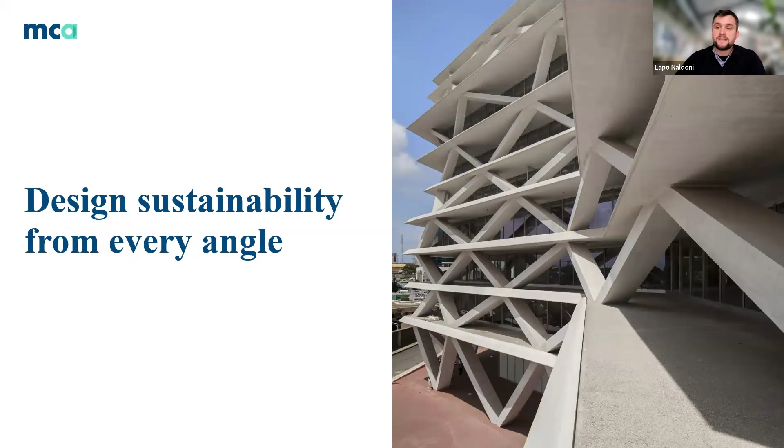In that case, now we have this building that we designed in Africa. What is nice to see is that the shape of the building is designed in order to help the people that will build it, in order to have a very simple system in terms of climatic control, and of course in the buildability of the building, because the building itself is made of just two materials: concrete, reinforced concrete, and glass. Nothing more, so no shading system, because the structure itself is the shading system of the building.

So what we think is that we can redefine the beauty of our time by putting together sustainability—all the systems that we need in order to have a sustainable building—and the systems that we use for our buildings. All of this is inside the sustainability development goals. So we have very strong requirements from our nations, and the goals are really complicated to be reached. We know that we have very strong challenges, and we try to do our best in order to reach as much as possible in all the angles, all those targets.

And what is relevant for us as engineers and architects is that we are responsible for a large amount of the use of energy, and of course for the production of CO2 related to the production of materials and the use of the buildings.

Usually inside the R&D department, when we start to discuss a building, we know that when we decide the strategy to build and to design our building, usually we focus our attention on the operational phase. But what is crucial is to know that we are just speaking about 50% of the total amount of energy, so of CO2 emissions that we are considering.

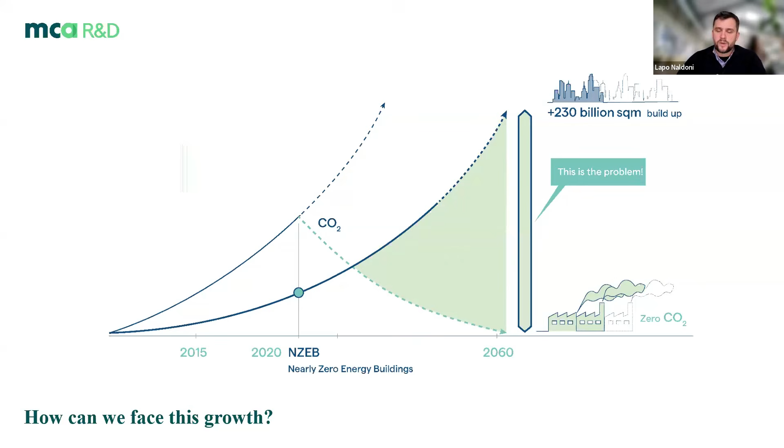For this reason, since the beginning, inside the office, inside Mario Cucinella Architects, we have a department of research and development where I am. So the focus of the team is to support the architects and the engineers inside the office in order to find the best strategy to create a strong concept in the architecture from the beginning.

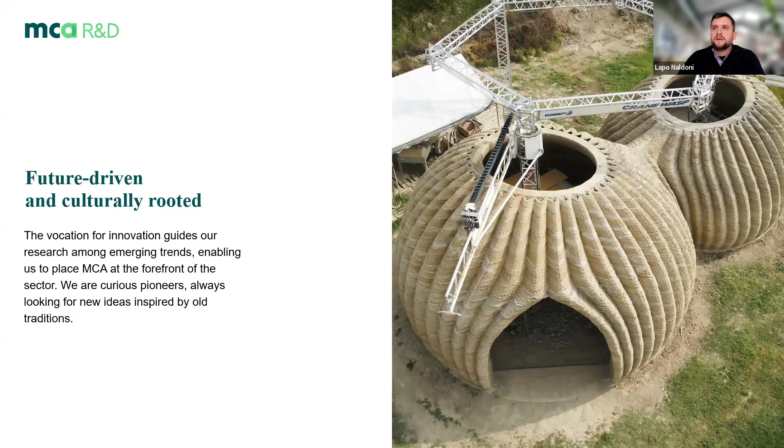Of course, everything is done with really culturally rooted ideas. So as the architect usually says, the future is a journey in the past. And I mean, every time we try to take the best from the past in order to have a good idea for the future. Of course, we have not just this mission.

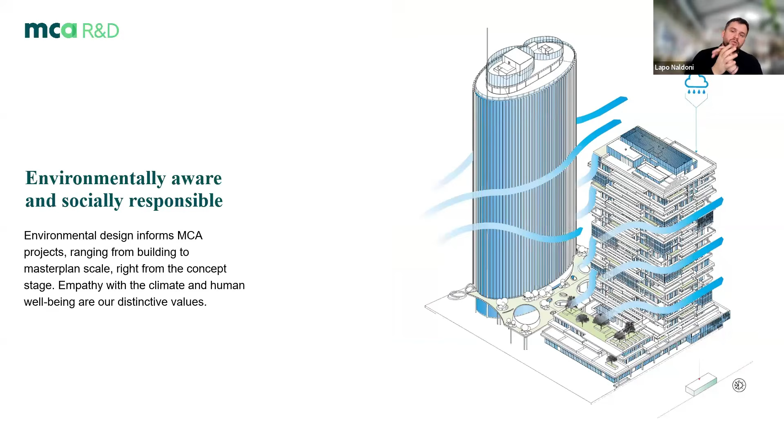We work a lot in terms of environmental studies, so we help the teams to find the best strategies to control the environment that we have around our buildings. So in that sense, in our office, we can say that research informs projects. With the research, we inform our colleagues about new technologies, a new approach, and the projects inspire us to develop new research for the next steps.

Let me start now with some projects that we developed on the 3D printing side. A technology that in the last 10 years has really been under the lens of attention around the world. So the office started at the end of 2019 to discuss with 3D Wasp, an Italian company that develops 3D printers.

We started to discuss the possibility of putting the effort of 3D Wasp and MCA together in order to develop a project that can show the limit, so the upper target of 3D printing at the time. So for this reason, we started by taking into consideration all the ideas that at the time were related to the use of 3D printing.

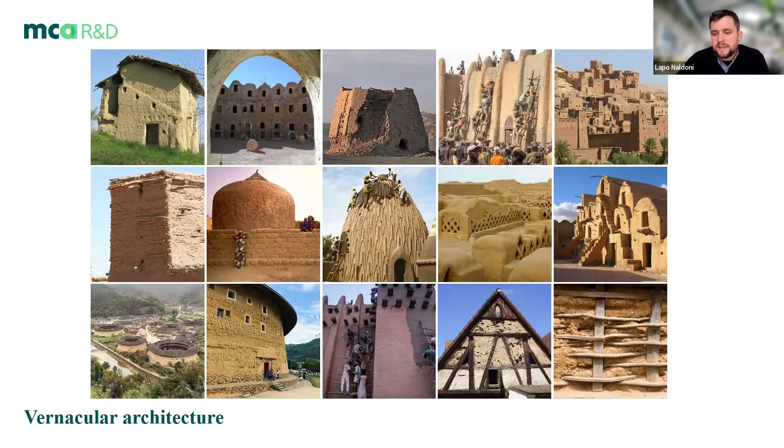And from this inspiration, we decided to start imagining how the use of 3D printing could be with natural material like soil. So together with the students of the Master of Sustainability of the office, SOS, we started imagining this kind of diagram in order to understand and to design a diagrammatic architecture that can be adapted in different locations. So we started from who will be the user of the building, the needs, the number of people that will use the building, where. So by taking into consideration the location, we take into consideration the climate, the materials, the resources that we can find. And with these, we develop the strategies together with the students.

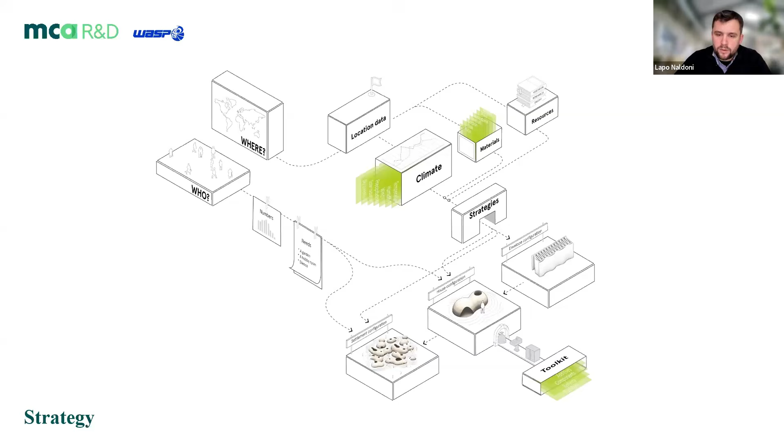And in that case, every time we try to push the students to develop a bottom-up system. So we don't want to start from the master plan and arrive at the technological side of the building, but we start from the walls that we can produce with the local resources. And with this kind of wall, we design the final shape of the building. And with the shape of the building that we have, we design the master plan. No? So it's not top down, but bottom up, from the wall to the master plan.

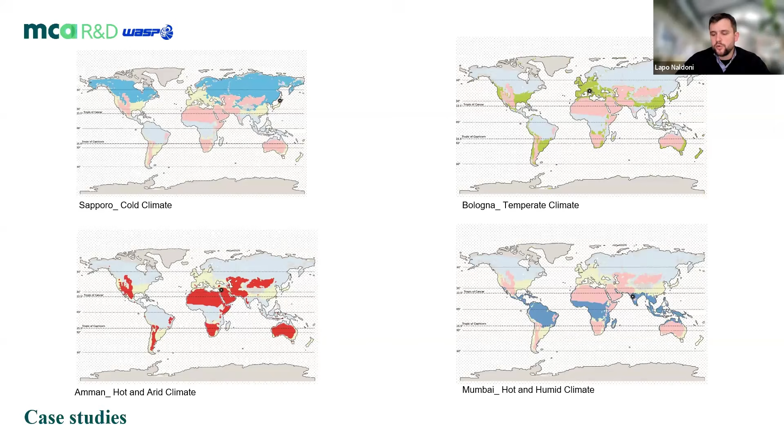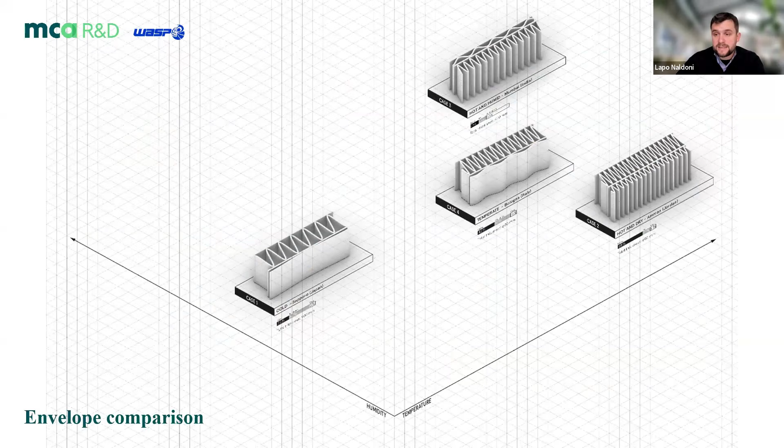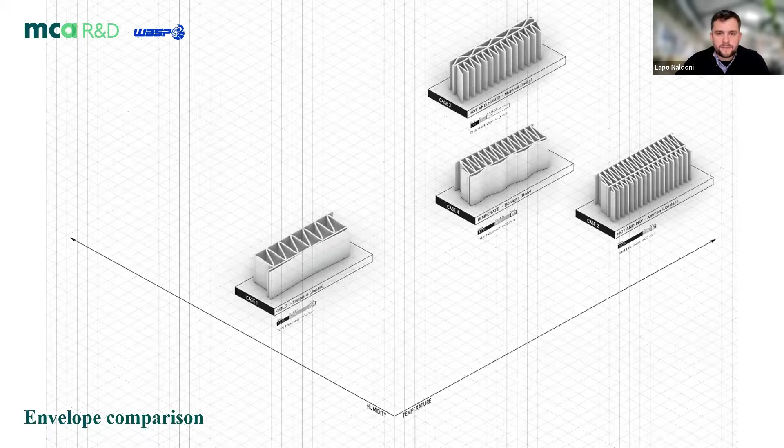And here you can see the different walls that a printer can produce with the same material, because starting from the exact same printable paste, you can decide the amount of ventilation spaces, the amount of insulation spaces, the amount of structural spaces. So in that sense, you can change the shape in order to solve different kinds of issues that you can find in your location. And in the case of Bologna, we started with the primitive surface that the office designed together with the engineering studio.

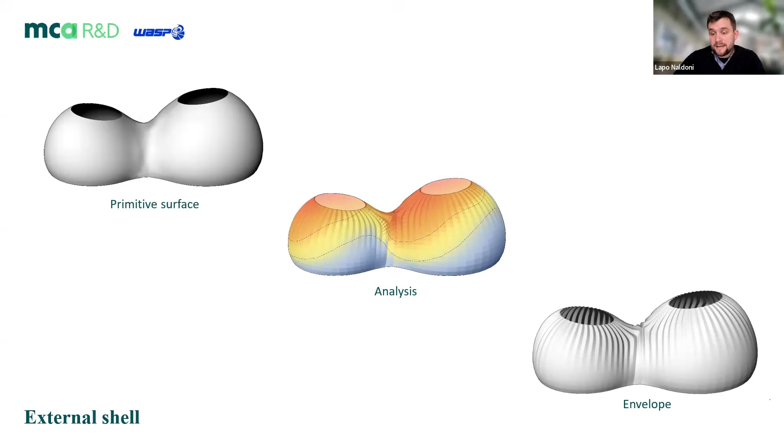And with this shape, we started to analyze the shape and decided to adopt this kind of corrugation that we use for 2 reasons: increase the natural ventilation along the wall, and reduce the heating effect on the surfaces, because this kind of corrugation helps in a sort of self-shading, like in the succulent plant, in order to reduce the effect of the sun on the surfaces. So here you can see a recap of all the different technologies embedded in the skin of TECLA.

It's nice to speak about the skin because it's really similar to what happens in a biological skin, because everything is interconnected. So we use the wall not only as a wall, but as a system to protect the people inside the wall. Here you can see one of the first renders designed by the students. And here we focus our attention on all the parts that are not printed. As I mentioned, we tried to print as much as possible.

This is the reason why Tecla has no roof, but Tecla is a dome. But for practical reasons, you can understand that producing tables, chairs, and all the furniture for the inside is more effective if it is done with wood. Same for windows and roof that are made of wood and glass. So everything was designed in order to be collected and shipped inside a 20-foot container.

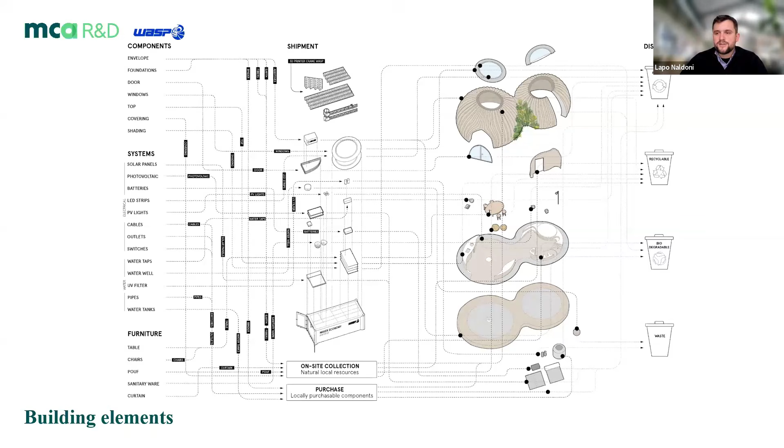And you can imagine that in the future, when you want to dismantle the building, you can just remove all these technological parts, and the building itself remains a sort of hill of soil. And as a matter of fact, you can see this image where we try to explain what happens if you remove the technological part from the building.

In this slide, you can see the work that we have done together with Mapei, our partner for the materials, in order to arrive at a printable paste. At the beginning, we started together with WASP in order to reduce the amount of water inside the paste, in order to reduce the shrinkage of the material. But we understood quite fast that this material had a lot of problems in terms of adhesion, one layer with the other, and pumpability inside the machinery.

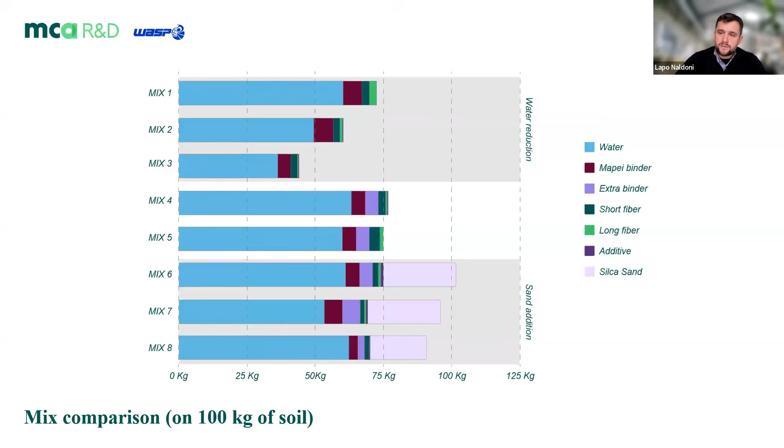So the pumpability was not perfect, so a lot of corrosion inside the pump due to the stiffness of the material. So we decided to change the mix and started adding silica sand in order to reduce the shrinkage but have a more fluid paste during the printing.

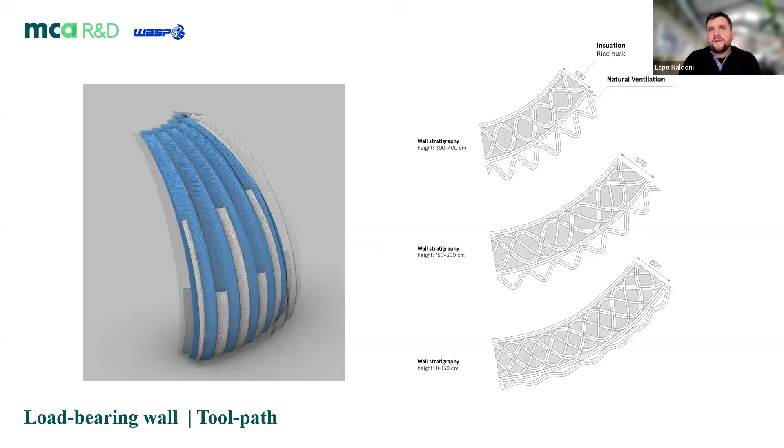So with this printable paste, we started working with Milan Engineering, our consultant for the engineering part. And we decided to use a structural part, only the blue part, and the white part that you can see on the left is just for the insulation and the ventilation of the wall. On the right, you can see how we changed from the bottom to the top the amount of material inside the wall in order to reduce the weight of the wall. I mean, the material was earth, so we needed to find strategies in order to reduce the stress on the material.

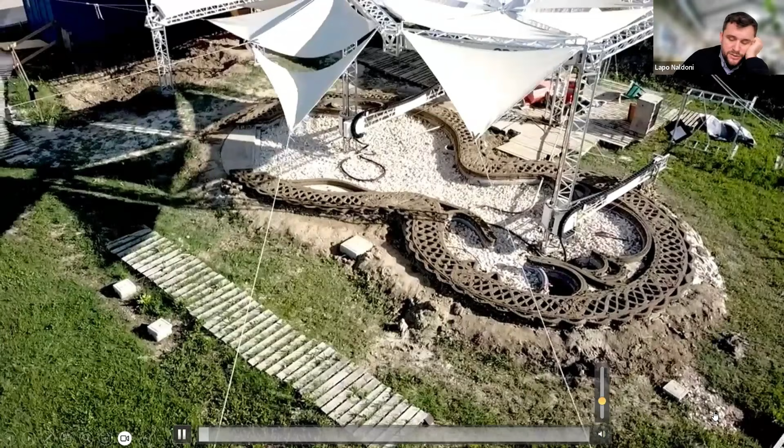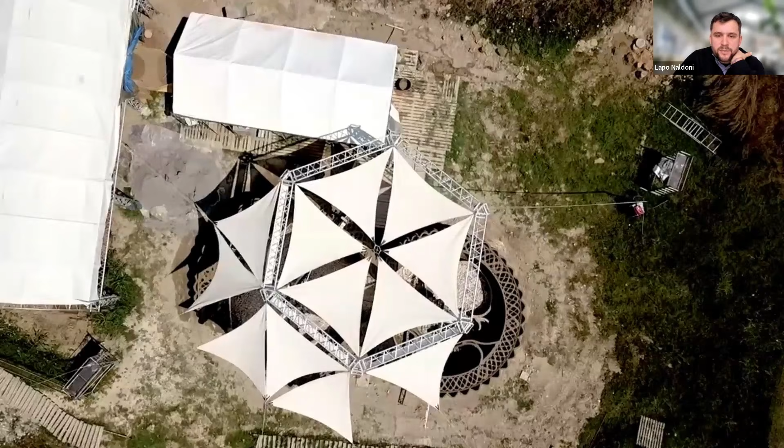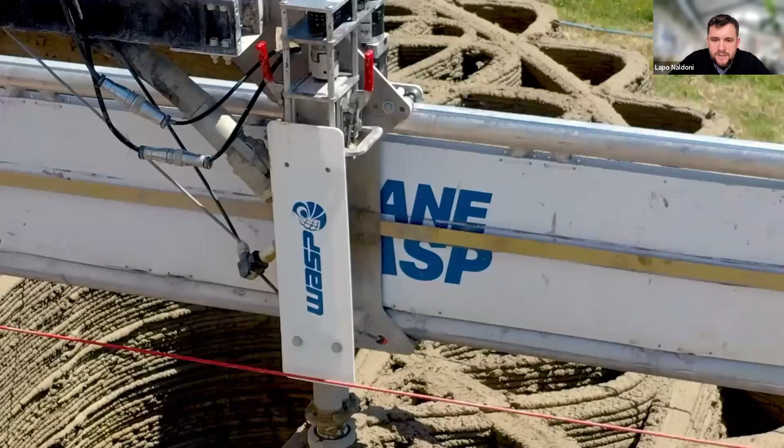Here we have a video of the construction phase of Tecla. As you can see, to build Tecla, WASP decided to use two printers. So the system that printed Tecla was composed of two printers that work together in order to avoid collision and reduce the printing time. So not one nozzle, but multiple nozzles in order to reduce the amount of time. We are speaking about something like 250 hours of building site, of course split across different weeks, because it was a prototype, and the machinery was a prototype, so everything was tested for the first time in this project.

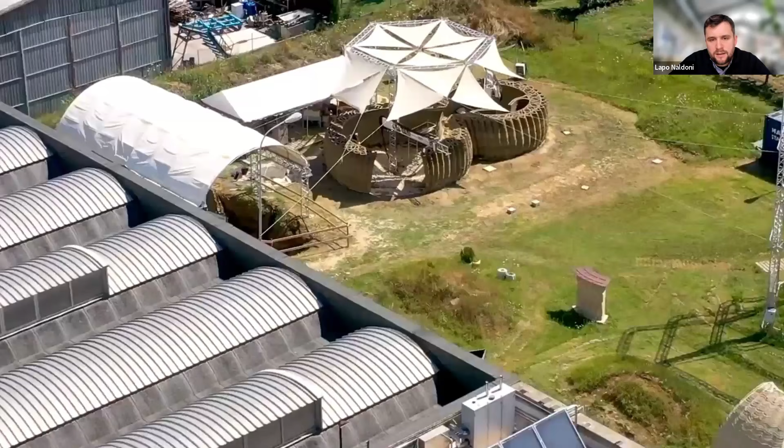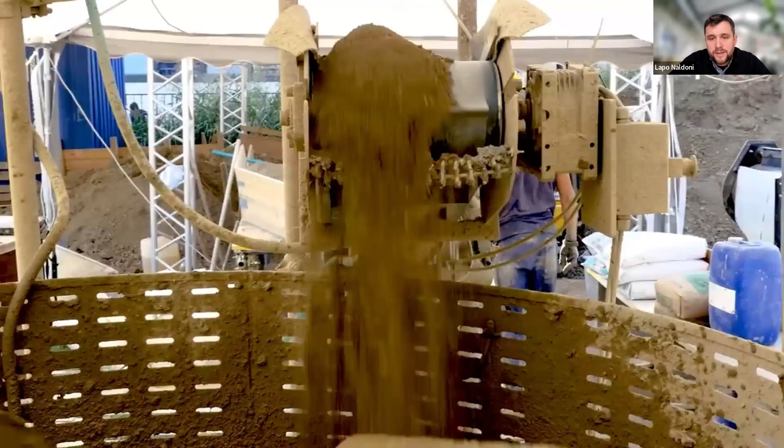As you can see here, you can see the ventilation part on the outside and the infill part for the insulation in the inner part of the wall. And in this time lapse, you can see that everything was printed and realized across August and September 2020. So it was during COVID, not the best or simplest time to have a research project, but we tried to do our best in order to arrive at this 3D printed construction.

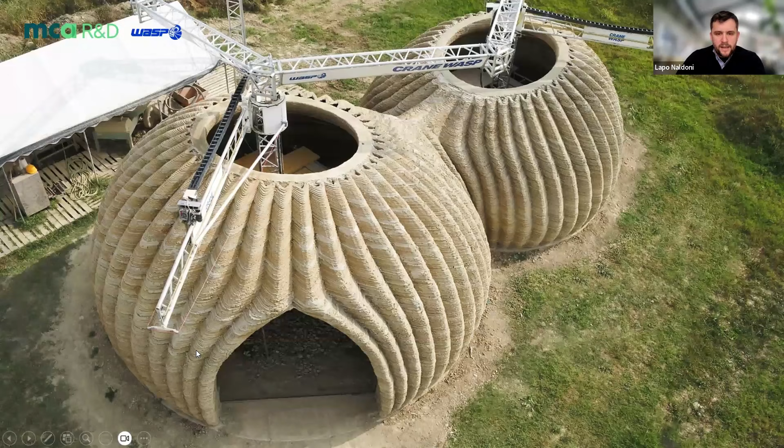But this is not the only project designed from the office for 3D printing. As I mentioned, TECLA was the first stage, but we understood quite fast that it was not so easy to have every time a building site that we can use with on-site machinery.

Those are some data, as a sort of recap of what I mentioned: 2 Crane WASP machines, 200 hours of printing, a lot of G-codes, kilometers of extrusion, 60 cubic meters of material, a lot of energy to use the machinery in the building site.

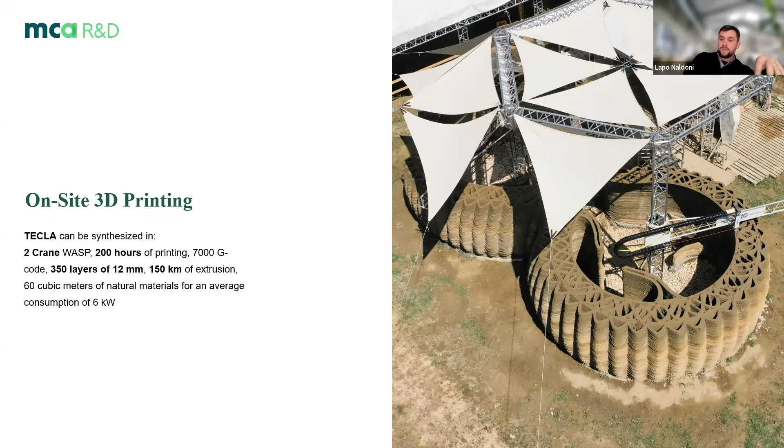Moreover, not every time is it possible to set up machinery in the building site. Sometimes you have building sites where it's not possible to transport the machine inside, or you have no space for the machine. Or in other cases, you haven't a lot of time in the building site for the machine. So sometimes it's better to have the option to use the same technology for speed, for costs, for injuries—so use the same technology, 3D printing, but not on site.

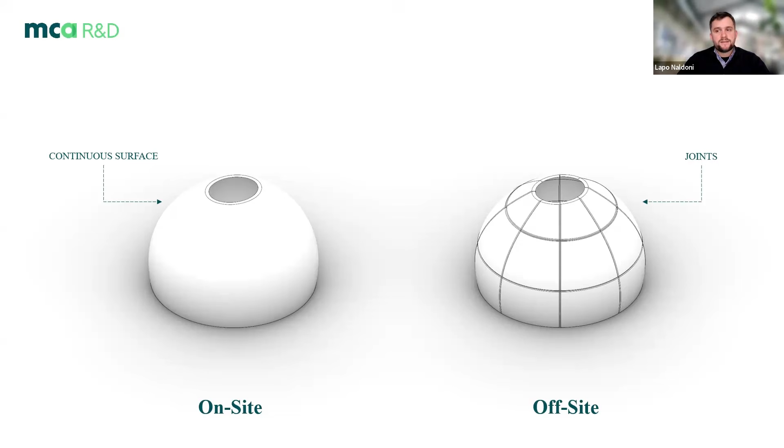So inside the office, we said, okay, we are architects—what is the strategy in order to use 3D printing to do something like TECLA, to do an architecture in this time. Of course, the first idea was to say, okay, we can split the dome and assemble the parts of the domes. But as you can see in this slide, the joint design becomes the most visible part of our building, so it drastically changed the aesthetical approach of our building.

So we started to try to understand how a 3D printed material is composed. As you can see in this slide, a 3D printed material is made of the infill, and when you speak about the infill, you need to know those kinds of geometries—in this case, a honeycomb. You need to consider that you can change the amount of the infill of your material, and of course the geometry of your infill.

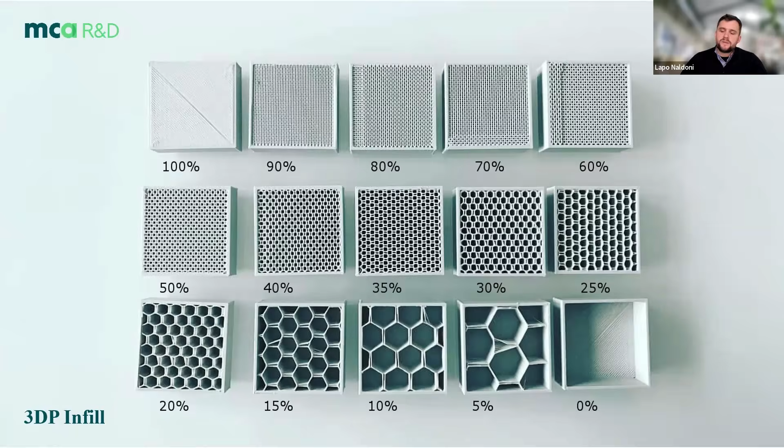So in that sense, we decided to say, okay, but if we remove the external shell, if we remove the dress, the skin of our building, what happens to our building? It became something more complex, but something that we can use in order to arrive at blocks that we can assemble, dry assemble, and use the joining part of those blocks as an aesthetical system for our building.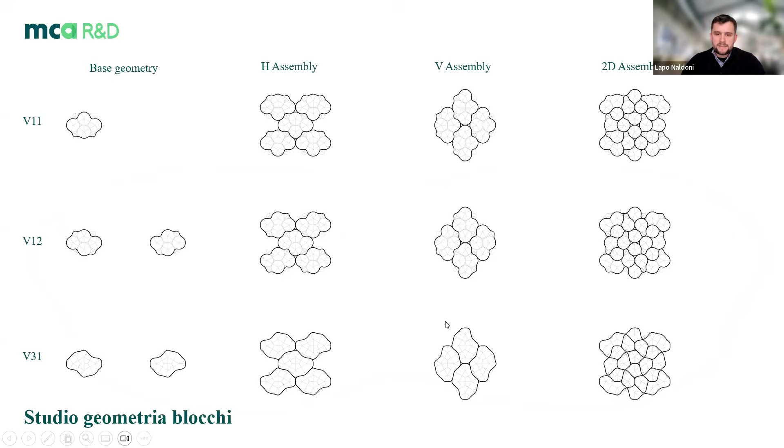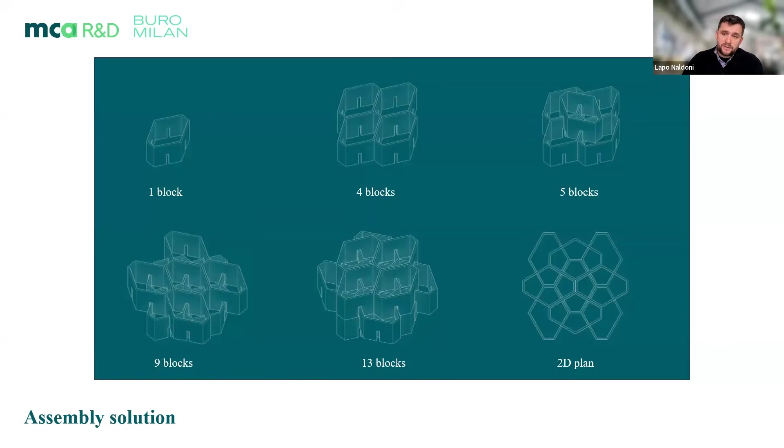In that sense, we started by experimenting with different kinds of blocks, and we arrived at using this hexagonal block with 4 windows that we use in order to interlock 4 blocks at the lower layer. So we designed this system that came from the Cairo Pentagon, and we decided to develop these blocks with clay, with ceramic.

Why ceramic? Because it's really strong and it's really fast, and it is a material from the past that you can reuse an infinite number of times.

So in a blink of an eye, we designed these blocks in 3D, and we produced with Fluente some mock-up tests at 1 to 3 scale, and we redesigned at full scale those blocks, and we tested with stoneware, with recycled stoneware. We tested the system—we print with raw clay and we fire this clay inside the kiln, around 1200 Celsius degrees, and we obtain these kinds of really strong blocks.

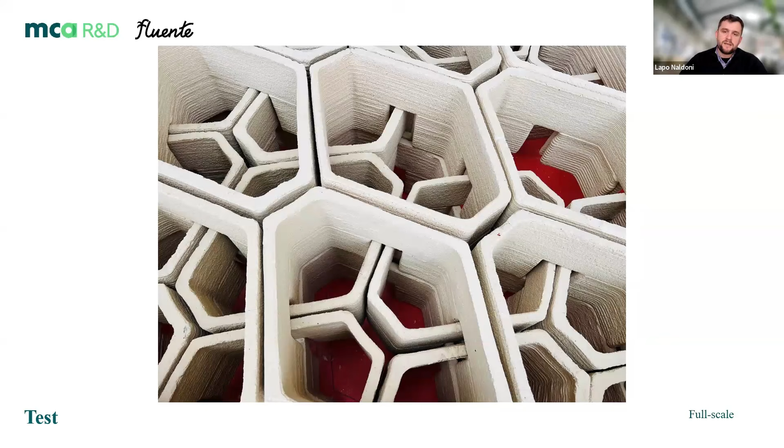The first moment to test the system was together with Roca, a very big company, a very big player in sanitary ceramics. And we decided together to use this system in order to speak about a very big innovation that they represent in 2024 at the Milano Design Week.

So together with the team of Roca, we wanted to speak about the first electrical kiln for the production of industrial ceramic—so it is a tunnel kiln entirely powered with electrical energy.

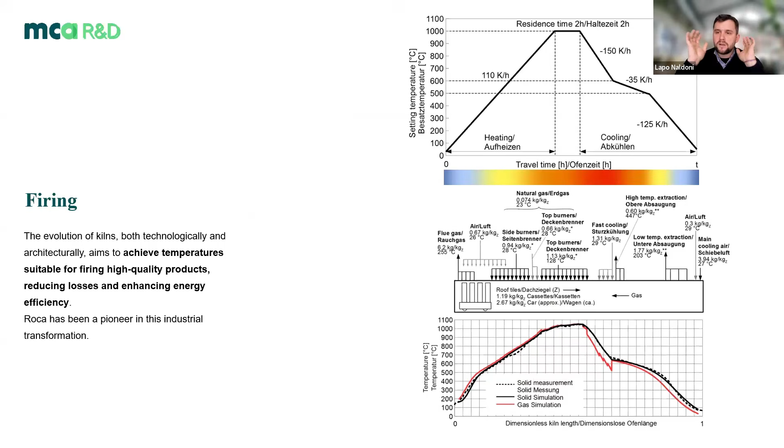So a relevant point of this kind of kiln is the perfect control of the temperature curve inside the kiln. For this reason, we decided to use our material, our blocks, in order to materialize this curve and to use this curve as a room, as an installation inside the Milan Design Week.

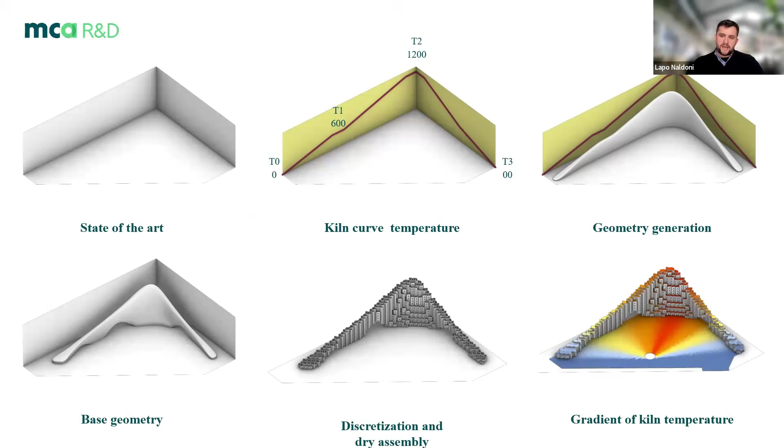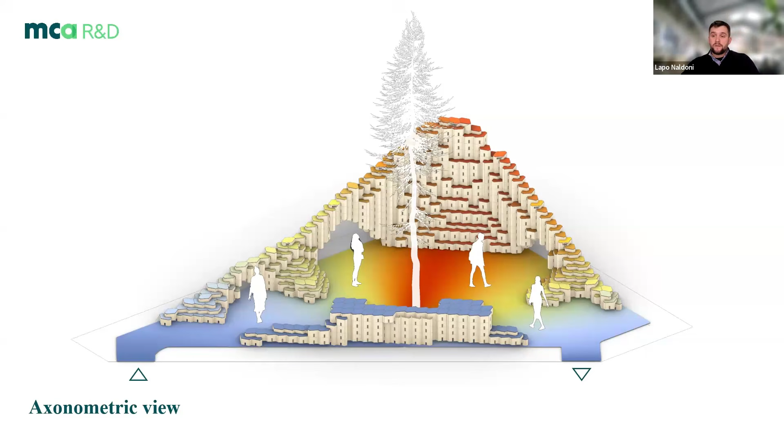As you can see here, we materialize in the corner inside the statale the installation we have, and we realize this experimental and sensorial space where you can understand the firing of the ceramic at different temperatures. Starting from the blue, we arrive into the red in the center, and we go back into the blue. We materialize this installation with 1,200 blocks. Here you can see the final results.

What happens with this installation is that we use the same blocks three different times in different events of Roca. We reuse the same material and transport it across Europe for different events and installations. This is really nice for us because it represents the possibility of reusing material, especially in a case like this where usually you produce an installation, use it for one week, then dismantle and destroy it.

In that case, everything was moved with very high attention because we reused the same material many times.

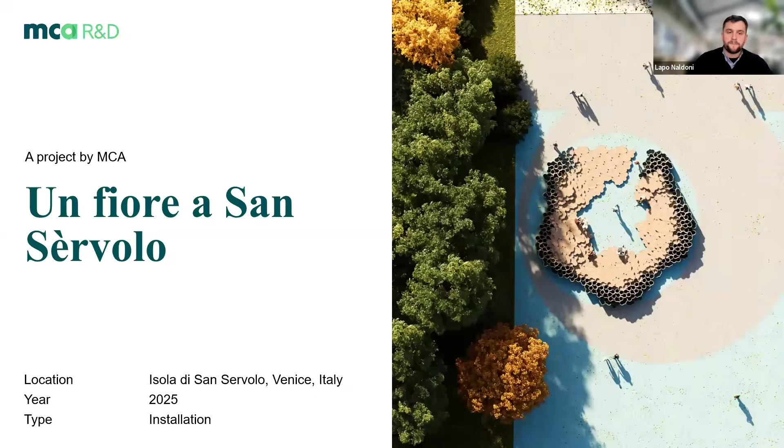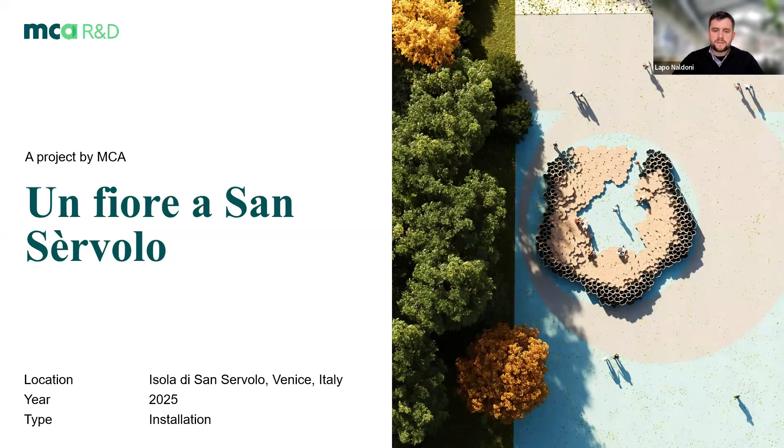The second experiment we have done in terms of off-site printing is a very nice and very challenging project, because it was designed for the island of San Servolo in Venice, inside the laguna of Venice.

What happens here is that the client asked us to design a project to change the use of the football pitch you can see at the bottom of the island, because it's a part of the island that is unused, and they want to use this space for cultural events, theater, ballet, for all the potential outdoor events they have during the summer. They asked for something innovative to be built inside the island.

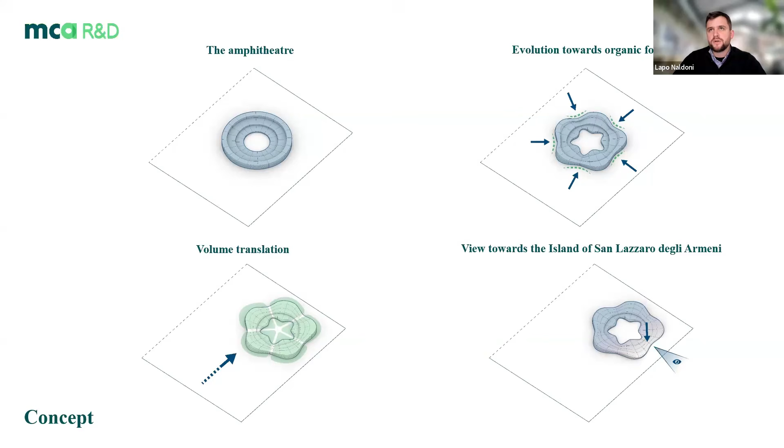So we tried to find a way to move the nature from the surrounding area into the football pitch. Starting from the shape of the amphitheater, we tried to obtain something more fluid, more usable, and more open to the outside, and of course open to the island in front of San Servolo with its beautiful church and tower.

As you can see, we decided to locate the theater in this portion of the football pitch, the one with the most beautiful view of the laguna. Here you can see that we materialized everything with something like 900 blocks.

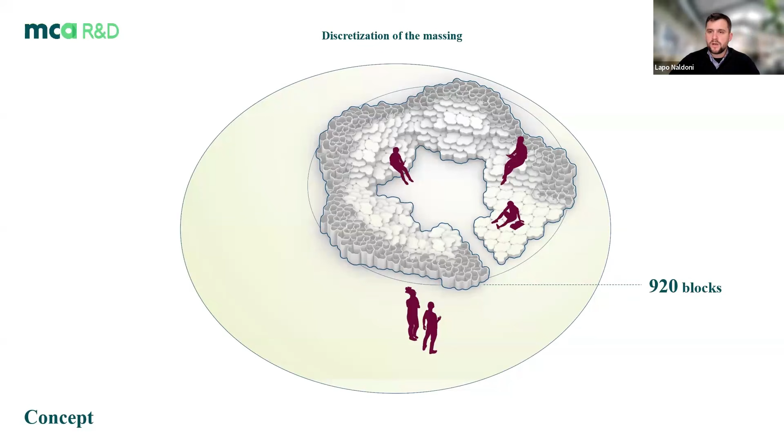But in that case, we are inside the laguna, and moving all the blocks from Italy to the island of San Servolo is really complex. The transport and logistics inside the Laguna of Venice are really complicated. So for this reason, we decided to use a different approach: we worked with Erratic, an Italian company that produces 3D printers, and used this small, movable robot. We moved the robot and the pumping system onto the island and produced all the materials we needed right there.

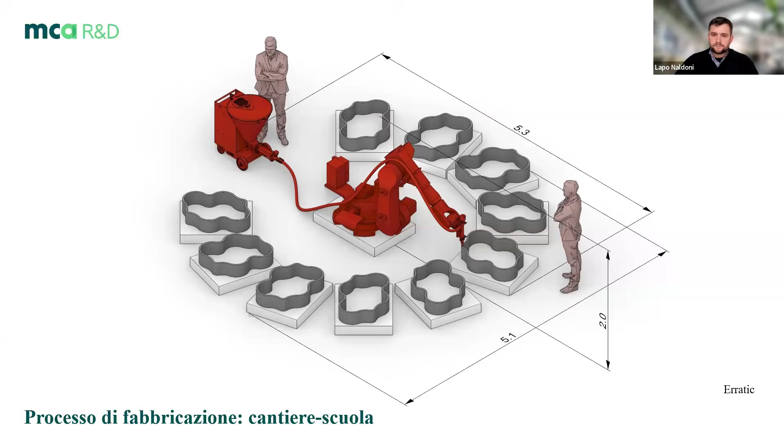As you can see, we started testing the system on the island, and we designed this shape of blocks to help the stability of the material during the process. The limitation of those blocks was the weight, because everything had to be assembled by hand without machinery.

The second point is that we used lime-based mortar. The lime is really unstable during the process, so to increase the stability of the material, we designed these waved blocks, and those waves help the stability during the printing process.

So we used that issue to create a design. Here you can see one of the first assembling tests, considering that for this system we used a family of 47 different blocks. And here you can see our warehouse, which was the football pitch, at some operational moments.

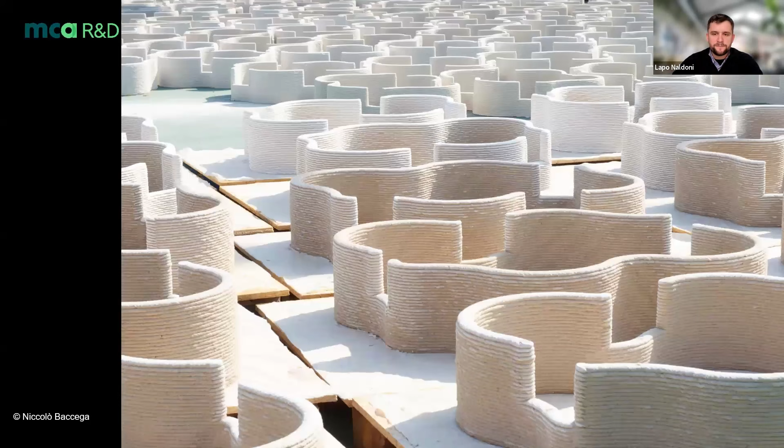And here you can see the different stages of curing of the blocks: the darker ones are the freshest, and the whiter ones are more aged.

So we tried to design this system in order to give this part of the island a more suitable use.

The last project that I want to show you today is an installation that we have done for the Arte Sella park. Arte Sella is an art park in the north of Italy, in the Alpi, close to Trento.

Basically, the idea was to work inside this place that was strongly damaged from the Vaia storm a couple of years ago. So we decided to design something that can give people the idea that nature can protect us and not only destroy our environment. Nature is not just the storm. Nature is something more, something that we need to live with.

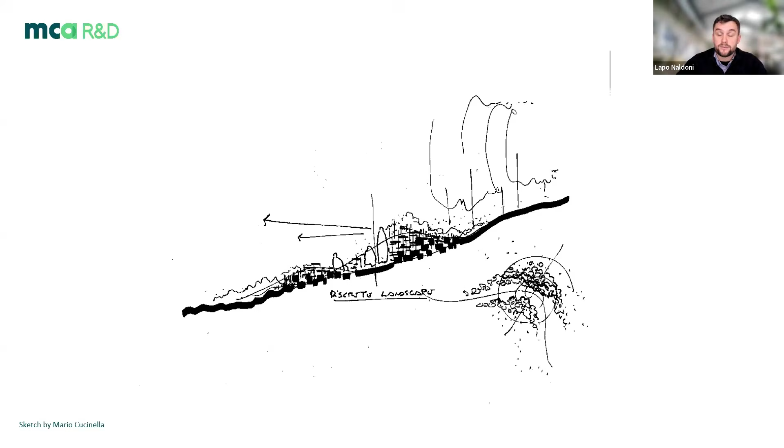So we decided to design something that grows from the earth and can take people inside in order to take rest and take a look into the Arte Sella park.

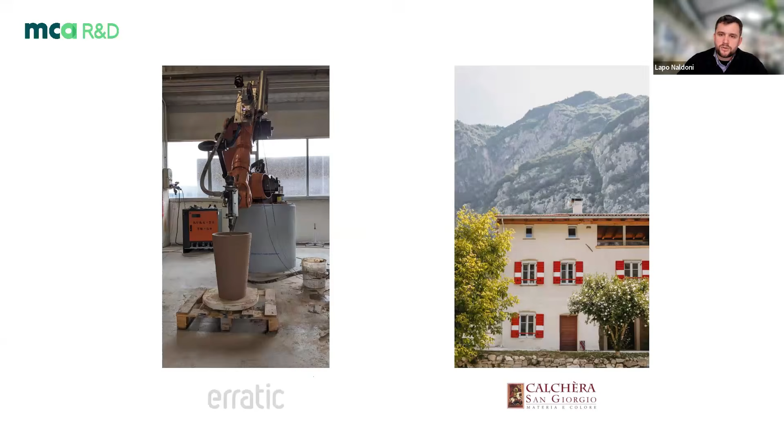For this project, we decided to work with two companies of this region: one is Erratic, and the second one is Calchera San Giorgio. Calchera San Giorgio is a very ancient company that works only with natural materials. They take inspiration from Roman materials, and they reproduce the materials of the Renaissance and Italian history.

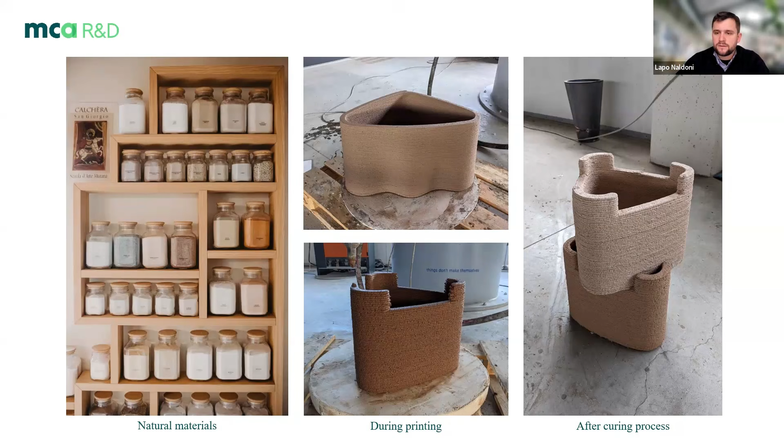So with them, we decided to do something really similar to TECLA. We started putting together local materials in order to find a way to use a lime binder to combine the tonalite and other stones of this region. Calchera San Giorgio worked together with the Polytechnic of Milan in order to arrive at a suitable mix.

As MCA, we designed this installation made of 50 different blocks with 3 different colorations representing the color of the local materials. We assembled all the blocks together using local manpower, trying to use as much as possible the local sources, the local energy, with a global approach.

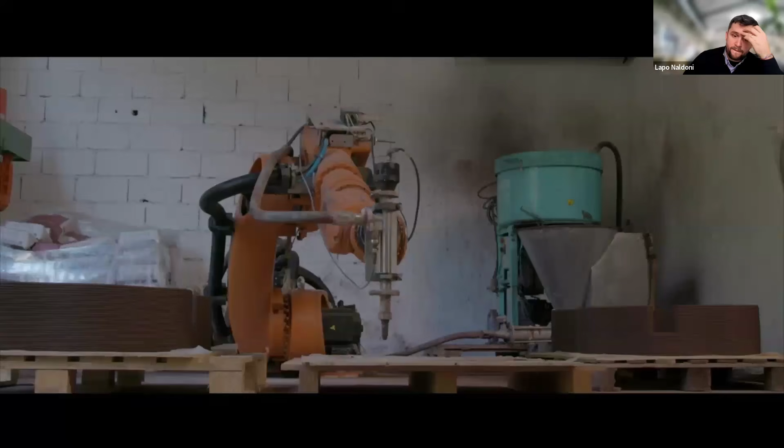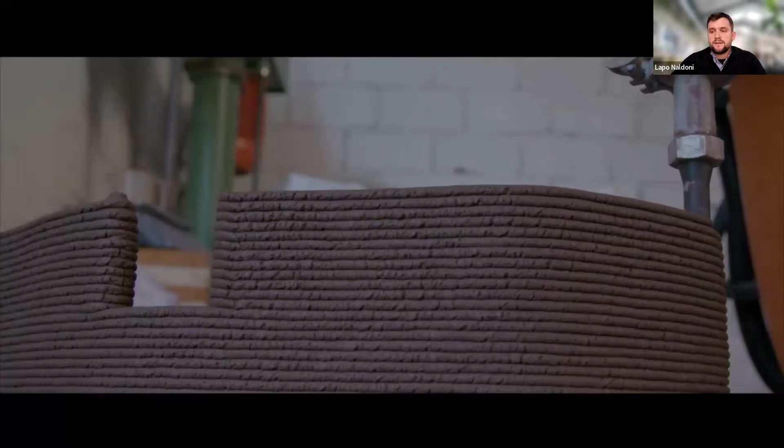Here we have a video of the process where you can see the robotic arm printing with this precise material, based on 60% tonalite dell'Adamello and 30% lime and other natural additives. Here you can see the installation where we worked together as MCA, Erratic, Calchera San Giorgio, and the local manpower.

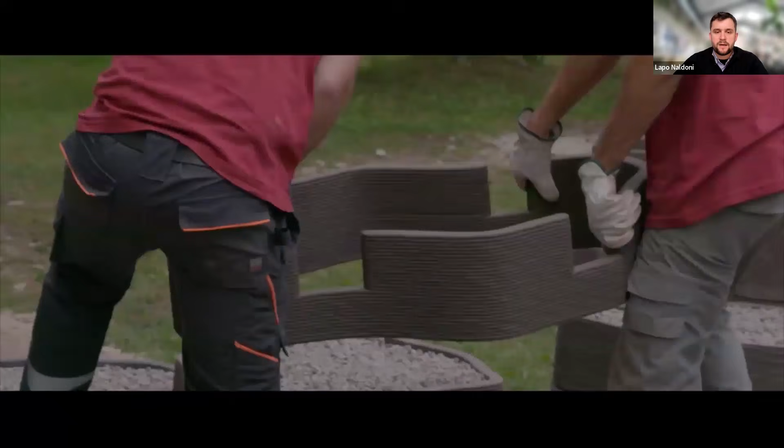We interlocked all the blocks without the use of any kind of glue. So everything is dry assembled and everything could be disassembled just by removing the blocks.

Those are some pictures of the final results of the Arte Sella installation called Discrete Landscape. One of the ideas is to add nature inside the blocks, and maybe in some years the installation will become part of nature. So now we are designing not against but with nature.

Those are some details of the blocks and the different colors, which are really close to the colors of the stone, because the stones are inside the blocks, so it's so similar. And this is a view from the bottom, from the top, sorry.

Okay, this was the last project. I think the timing is more or less okay. So thank you for the attention, and yeah.

Hi, Lapo, thank you so much. Hi, thank you so much for the presentation. It was amazing. I'm actually a really big fan of TECLA, and I've always wanted to hear you guys talking about it, and it's so interesting to learn a bit more about it. Thank you so much, it was an amazing presentation.

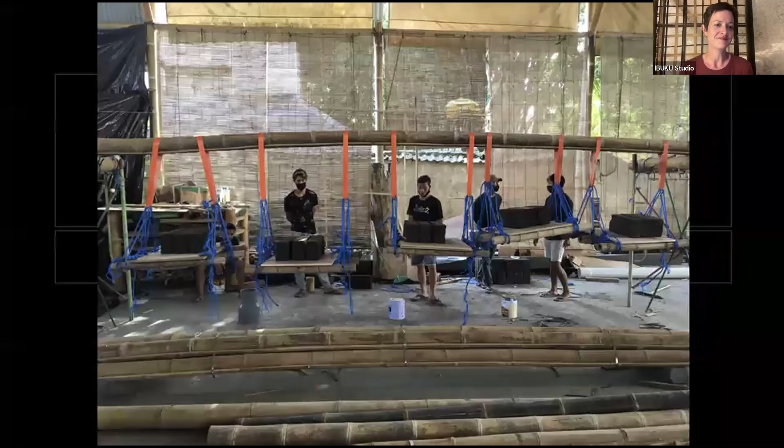Because we're on a new frontier, that means we have to understand the material we're working with, to really get to know it, to listen for how to work with it on both a practical and an intuitive level. Here we are doing tests in parallel to construction. These big spans of the arc at Green School Bali taught us a lot about limits, deflection, joint behavior, and about working with engineers from day one in the concepting of a project. So we push the form, but we listen for where bamboo is in the comfort zone and where it needs support.

This is the arc at Green School in Bali, built in 2021, and it was a leap into the future of possibilities for natural materials.

Our engineers, Atelier One, won the Supreme Award from the Institution of Structural Engineers for this building in the UK that year—not just as a sustainable material award for bamboo or timber, but the overall award for the year.

Inside, this building feels more like a body than most buildings you've been in. The thing about bamboo is that it sequesters a huge amount of carbon as it grows. It grows incredibly quickly, absorbing CO2. When we turn it into long-lasting buildings, that carbon can stay stored in the structure. And of course, it's sequestration minus everything humans do to it.

So building with locally grown poles as we have has a much lower embodied carbon than comparable reinforced concrete or steel frames. Back in 2005, when my father and stepmother began building this school called Green School in Bali, without any building experience in their past, it made no sense to me until I saw it.

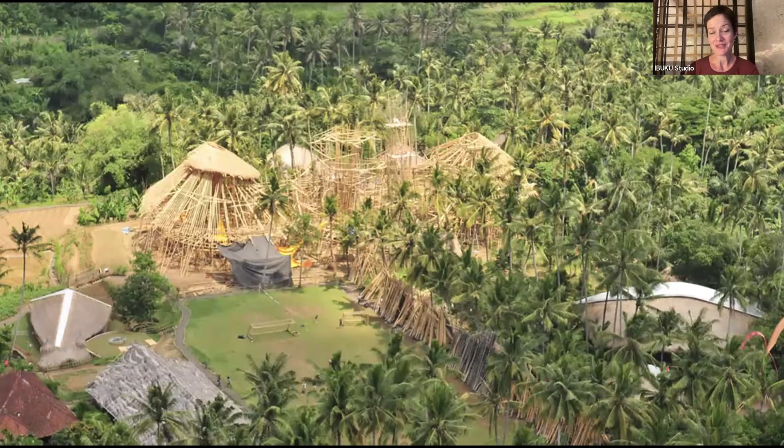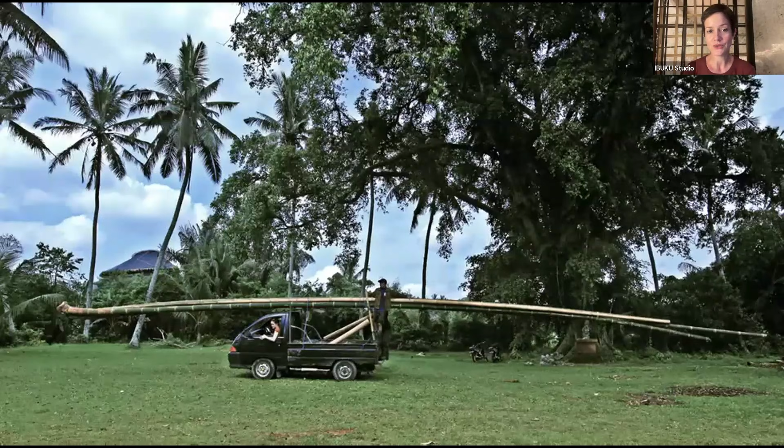We have harvested poles from hundreds of family-owned clumps—petung, as we call it. It's really long, up to 18 meters of usable length, but try getting that truck down the mountain. It's also very strong. There's tensile strength that can be compared to steel and compressive strength comparable to concrete, giving it a really impressive strength profile.

It's also hollow and lightweight—light enough to be lifted by just a few people. So when they chose bamboo to build the Green School, it was because they had named the school Green School, and they decided that sustainable timber wasn't well developed in the region.

You couldn't have credible sourcing for it, and reclaimed timber just felt like reusing something from the past instead of taking a stand for the future. So they saw bamboo as the right material because it was a promise to the kids that it's one material they can grow enough of and that they will not run out of.

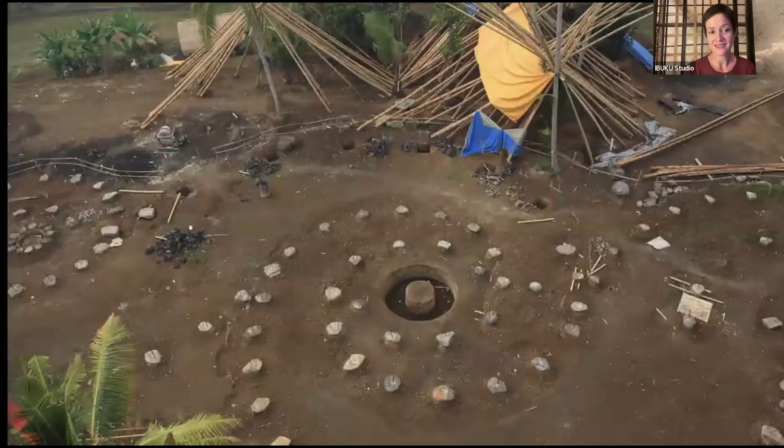The problem is no one had really built anything higher than one story with bamboo or in any curving form. And when I saw what they did in just the first year, it did seem to make perfect sense. Beyond being sustainable, being a little bit less bad, bamboo really embodies goodness. And when I saw this, I thought, why hasn't this happened sooner? And what can we do next? With this material, you really can be light on the land.

I'm still mesmerized by the simple beauty of these foundation points. These are huge rocks on which multiple poles of bamboo each stand. They're the moisture barrier. So along with the original builders of Green School, I founded IBUKU. Ibu means mother and ku means mine, so it represents my Mother Earth. At IBUKU, we're a team of artisans, architects, designers working together with Bamboo Pure. It's an artisan construction workshop. And what we've done together is really to create a new way of building.

Over the past 15 years, we have built over 200 unique structures. Some of my favorite ones I designed at Bambu Indah, our family hotel. Please come visit us in Bali. You can come swim in the spring water in the jungle, or stay in our newest guest room. This is New Moon, where you can jump out of the window into a completely natural spring-fed plunge pool.

We've just added a riverside restaurant. Here it is at concept sketch stage. Here it is complete, nestled among the rice fields. And while you're there, you can also see Green School. We keep building classrooms every few years there. This is the new makerspace, which will open later this year.

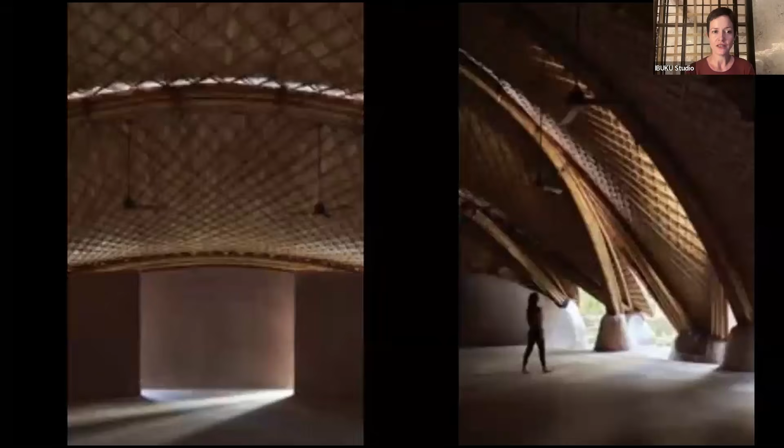Continuing the innovative system of grid shell that we developed for the ARC at Green School, we created Lumi Shala at Alchemy Yoga Center. It features this grid shell system, which is really a whole different evolution from what had ever been done before in bamboo.

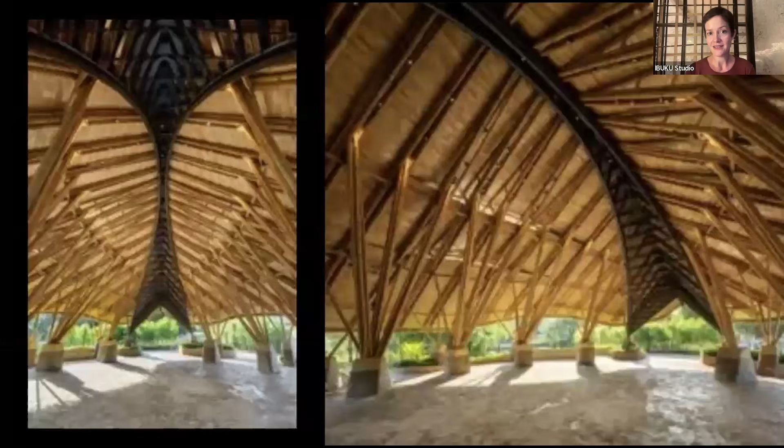And in the nearby Philippines, where there are some of the strongest typhoons in the world, you can also see a giant bamboo building. In this case, we chose a combination of an elegant steel spine engineered for those typhoons, and asking the bamboo to be doing everything structurally would have just been a lot of bamboo. It's possible, but it wouldn't have been an elegant form. So we designed the combination of materials to be able to use each material wisely and to develop the possibilities in this part of the world with a way of building in bamboo that was mostly unfamiliar to them.

We've also worked as far away as in Panama. There, we featured these tall timber stilts, trees that are reclaimed from underwater in the Panama Canal. This was built during COVID without us ever going to site, so we had to use very simple bamboo techniques. There was a team who locally sourced bamboo from the region and had some limited skills of carpentry with bamboo. So we developed just the interiors and the very top floor with bamboo, because the bamboo needs to be protected from weathering, so the roof overhangs just far enough to protect the top level of columns from the rain.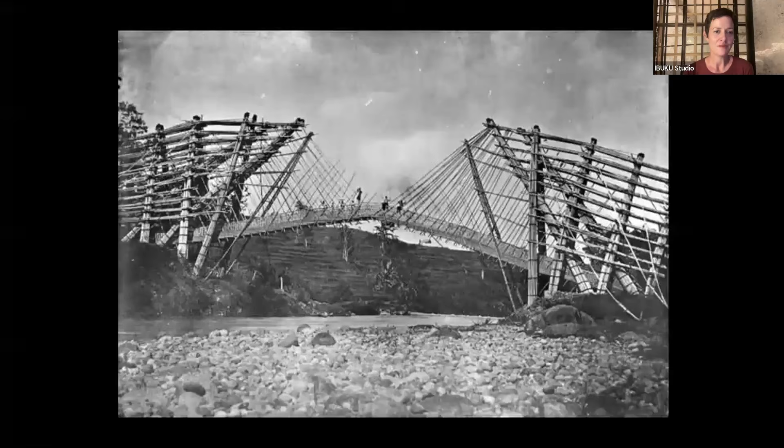Now, what we're doing isn't entirely new, from simple huts to elaborate bridges like this one in Java, sometime 100 years ago or so. Bamboo has actually been in use across the tropical regions of the world for probably hundreds of thousands of years, if not more. There are islands and even continents that were first reached by bamboo rafts.

But unprotected bamboo does weather. Untreated bamboo gets eaten to dust. And that is why, until recently, it was almost impossible to reliably protect bamboo from insects. Just about everything that was ever built out of bamboo in history is gone. That is why most people, especially in Asia, think that you couldn't be poor enough or rural enough to actually want to live in a bamboo house. And so we thought, what will it take to change their minds, to convince people that bamboo is worth building with, much less worth aspiring to?

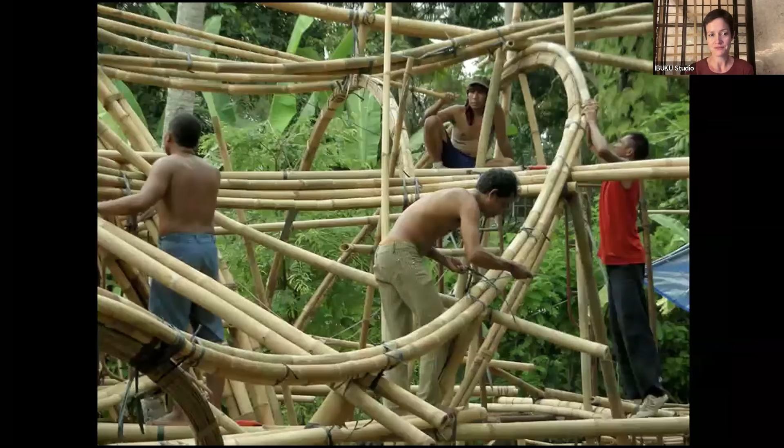Because if you treat it properly, if you design with it carefully, engineer it, a bamboo structure can absolutely last a lifetime. The thing that we have found is our path, our journey, our role is to build something extraordinary out of it, to really inspire people to go beyond what is necessary.

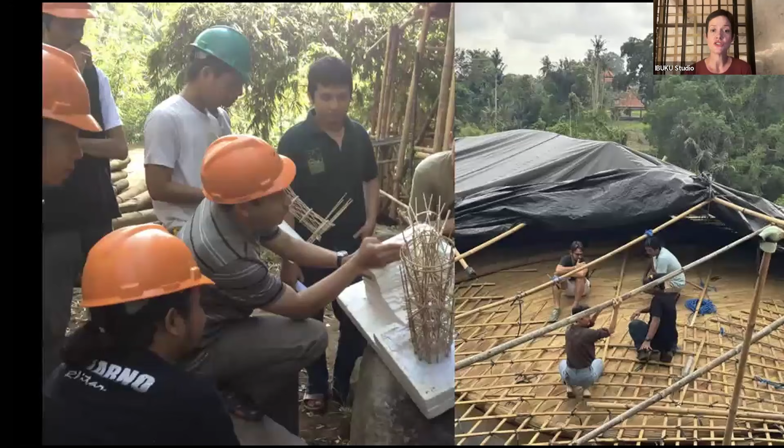And we're able to do this in large part because Balinese culture fosters craftsmanship. It values the artisan. And Balinese village men have been working with bamboo for more temporary structures to do with ceremonies for many, many generations. And they also have a lot of skill in timber. So to combine those and to teach them new techniques and collaborate with engineers and architects to create this real new adventurous generation of outliers in the industry, to be able to create extraordinary things.

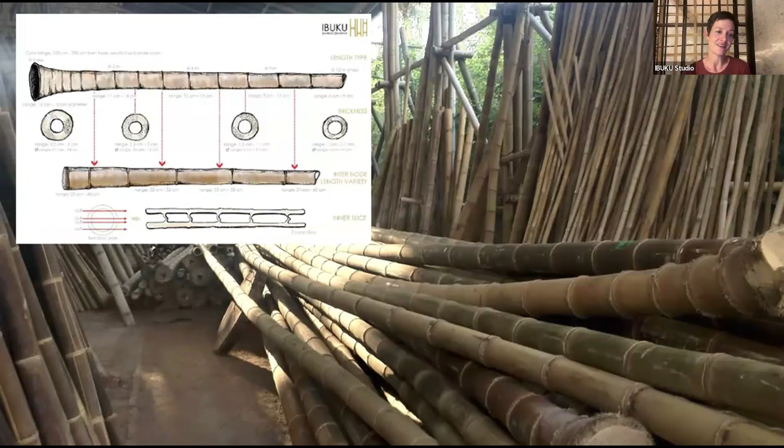What we have to always remember when we're building with poles is that they are curving, tapering, hollow poles. No two poles alike, no straight lines. These are not 2x4s, and I confess sometimes I dream of 2x4s. The tried and true, well-crafted formulas and vocabulary of architecture do not apply here. Good thing I don't know those things. I didn't train in architecture. I haven't studied architecture. Therefore, I didn't know the rules to reinvent them, but many of my team did.

And together we have been able to look at which traditions and which customs and which common ways of working should be held to and carried forward, and in which ways we want to do things differently and we need to do things differently to achieve the kind of projects that we do.

Like many designers, the first thing we do is stand on the land and ask what can belong there. We don't start with a perfect form and then decide to make it. We start with the land, the climate, the people. We ask what should happen here? What are the risks here? What are the possibilities here? What should this building be made of? And the form grows out of that. When we're working with bamboo, we don't always work with bamboo, but when we do, we ask what it's good at, what it wants to become.

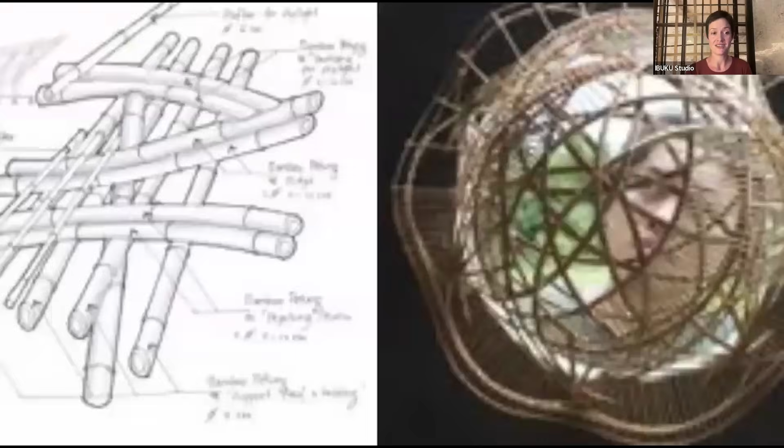And before we spend too much time drawing, we also talk to the craftsman, because the kind of designing does not happen on flat paper or behind a flat screen, or even in the 3D beyond the screen. There's a real tangible, visceral part of the process that we hold on to. This is a conversation. We design in real 3D, making scale structural models out of the same material that we'll later use to build the house. Bamboo model making, it is an art. And these, at first, we primarily built from bamboo models and from hand drawings.

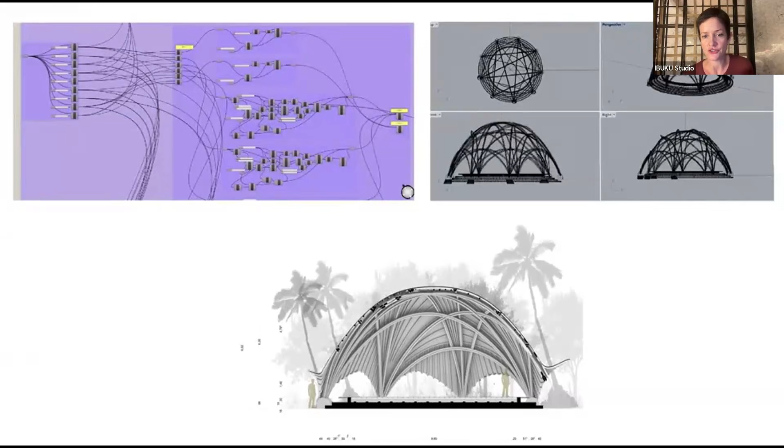And now we are increasingly supported by the digital. Even augmented reality is something that we are beginning to be able to use in construction, even though it's not precise, because we are used to operating with a range of tolerance because we're working with natural materials. So now we can be supported in a positive way by the digital, but we always keep pulling back to the analog as well. And we really need to bend the digital to suit our world. We need to plan for the range of tolerance that a natural material needs. And we're always looking philosophically, how do we keep ourselves grounded in reality?

So this is the first time, it was in 2021, when we used heavy machinery on site at all. And it was very helpful to lift these arches into place and position them in the way that the engineer required for the strength of the building.

Now, when it comes to the interiors, when it comes down to the details, we really consider everything and try to take a fresh perspective. In our world, right angles need to prove their relevance. We welcome them where they're relevant, and very often on these natural landscapes and in the building, once we begin a curving journey, it is not.

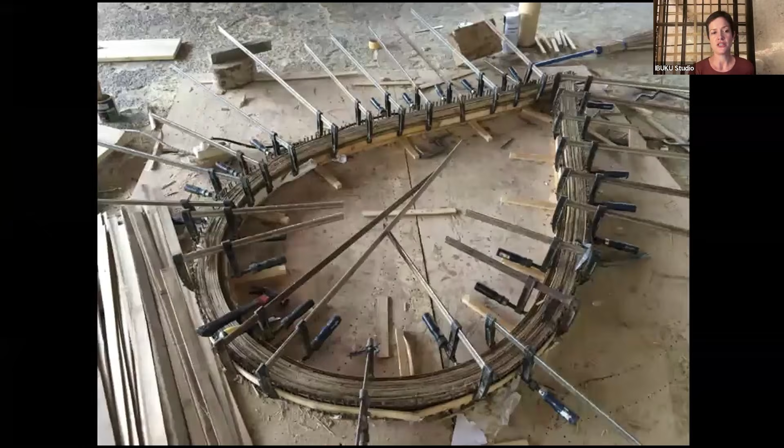So in this bedroom, we created a pivoted door, pivoted on the center where it can stay balanced. And the visceral experience of just pushing and having the momentum of the door is something that a lot of the residents of this house have commented on and appreciated. This is one of the few places in the house in Sharma Springs, the biggest one that I showed, where we even used glue. It was very purely bamboo at that time.

And to reap the selective benefits and work within the constraints of this material, we have really had to push ourselves to find space for something new. It's been a challenge. This room needed a ceiling, and we couldn't bear to put a flat ceiling in this context. So we wove the ceiling together.

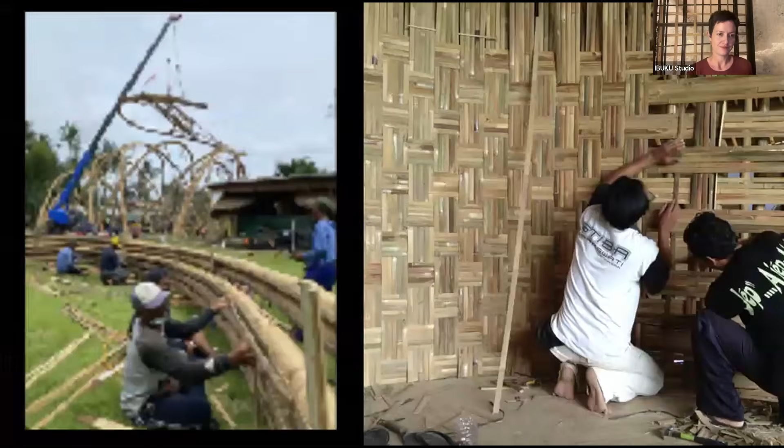There were no drawings of this. We created this on site with the craftsmen, planning with their sense of understanding of the material, how to achieve the strength and how to achieve the grace. We tied it together with little tiny bits of multicolored string, and we stretched t-shirt jersey over it and lacquered it. When we work with bamboo in Bali, where we have the skilled craftsmen, it is mostly handmade.

This supports livelihoods, education, biodiversity, and we haven't formally measured it, but that's part of the value of the stored carbon. For our first decade of building, we made everything out of these itsy bitsy little splits. I did not even use plywood in the ceilings or in the building or in the insulation, and we did not yet have access to industrially produced bamboo panels either.

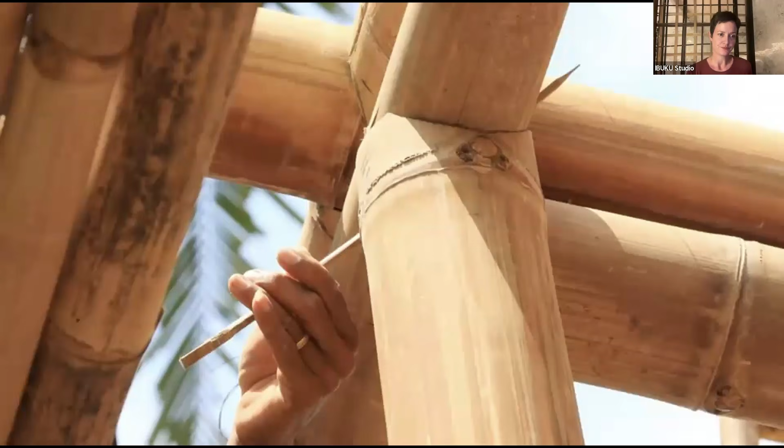The structural connections of our early buildings were reinforced by, and still are reinforced by steel joints, by steel pins, but we use a lot of hand-whittled bamboo pins in the process as well. There are thousands of pins in each floor, for example, and that is because the bamboo over time, the pin and the plank work together and expand and contract in harmony rather than introducing another element.

This floor is made of glossy and durable bamboo skin. You can really feel the texture under bare feet. One of the things that I really find is missing in the industrialized world, in the modernized world, in the minimalist world is texture, is variety, both for the eye to rest on and find relief in, and also for the skin to touch.

A floor, how can it affect the way you walk? If it's hard and impermeable, or if it's irregular, how does that affect the footprint that you will ultimately leave on the world, or the way that you walk in the world? And in the past decade, in our footsteps, there have been thousands more bamboo buildings built across Bali, across Indonesia, and many around the world, using our techniques, the innovations, and the craftsmen that we trained. We have built the bamboo industry in just 15 years.

On a vernacular tradition, but that vernacular tradition had a very limited palette of linear pole-based bamboo construction, right angles, traditional forms. We have taken it far beyond that. This is a material that was completely associated with poverty and temporary huts and maybe artistic traditional elements that were very short-term and temporal. But in under 2 decades, it has become a new vernacular: houses, schools, hotels. And this has been an extraordinary thing to see.

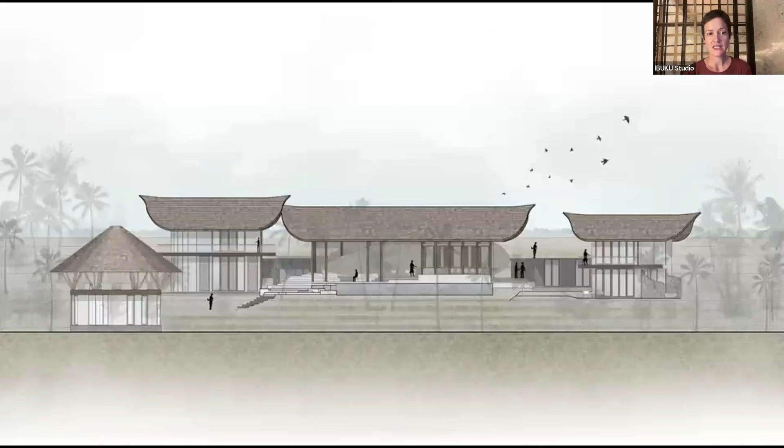So that's what we hold on to while we take on projects for clients who want a mixed media palette, as honestly most clients do. Our work is not entirely bamboo. For the past 5 years, our homes are consistently really a mix of materials. This one only has bamboo in the roof. And now when we start a design project, we ask where what material belongs.

This connects in with the codes of a certain region, with the durability or longevity based on the form, and what actually changes when you start a project by asking, given this place, these crafts, these codes, this climate emergency in the world, what should this building be made of? And that's where the conversation starts.

And then it evolves. We're playing continuously with bamboo innovation, with lots of grid shells, with glulam elements in our buildings. Once we got into engineered or laminated bamboo products, they do still perform better than steel and usually more than concrete on a per strength or per element basis. Bamboo isn't magic, but it's got some really great advantages. And to design with it, you need to understand it, as I think you must with any material.

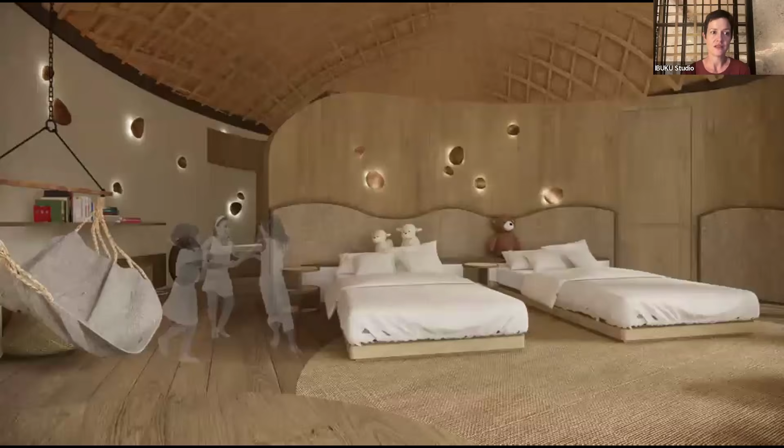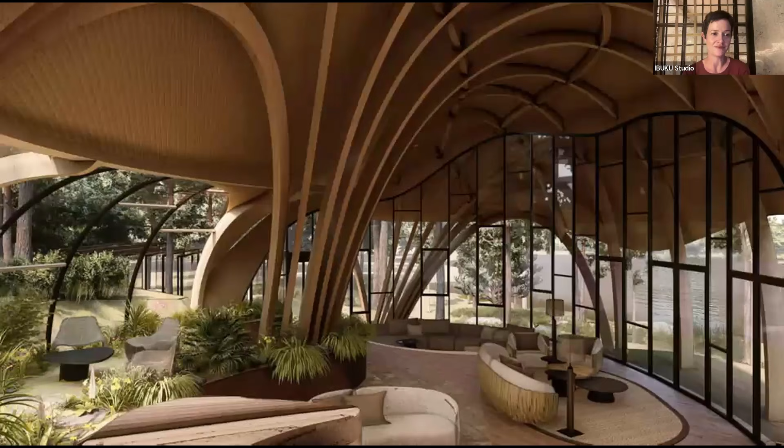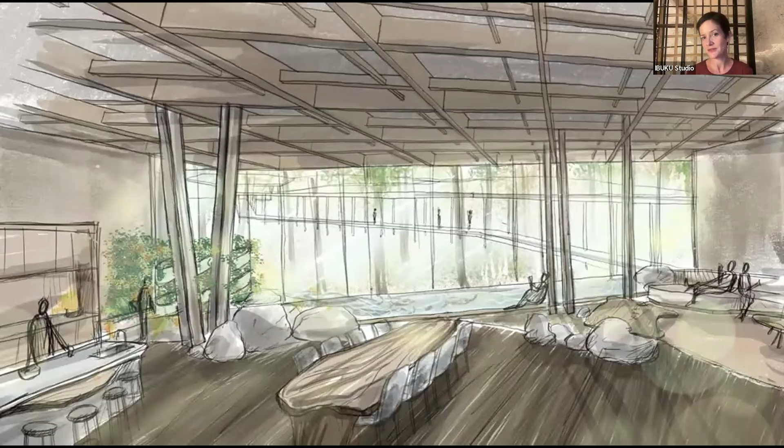So along with perfectly sealing curved glass windows and a combination of teak and terrazzo walls and floors, this house is going to be magical. For some overseas projects, and for people who want what we do, but in places where bamboo doesn't make sense or isn't allowed to be built with yet, this house is in the woods outside Atlanta, Georgia, and it's mass timber arches by Herring. And for this one, also in the US, we aren't doing any curves at all. It's all straight lines, but also we got away from the right angle.

In Bali, we've basically spent 15 years proving that you can build castles out of grass. And if we can do that with bamboo in this tiny corner of the tropics, what else is possible? What materials are we still underestimating? What could become the next impossible vernacular in the next decades? This is all just part of a process, part of a journey. And starting from the context, the land, the people, and the supply chains and the carbon story, these are the things that we need to think about as we choose what to build with.

If we insisted on only doing things toward the most beautiful, healthy future, we'd remember that being a bit less bad is not enough. We need to do good with materials that will grow back.

Thank you. Hi, Elora. Hi, Amanda. Hi, it's so good to see you again. It's been quite some time. Thank you so much for the presentation. It was incredible. I always love hearing you and seeing you talking so passionately about bamboo and all the work you've done. Thank you so much.